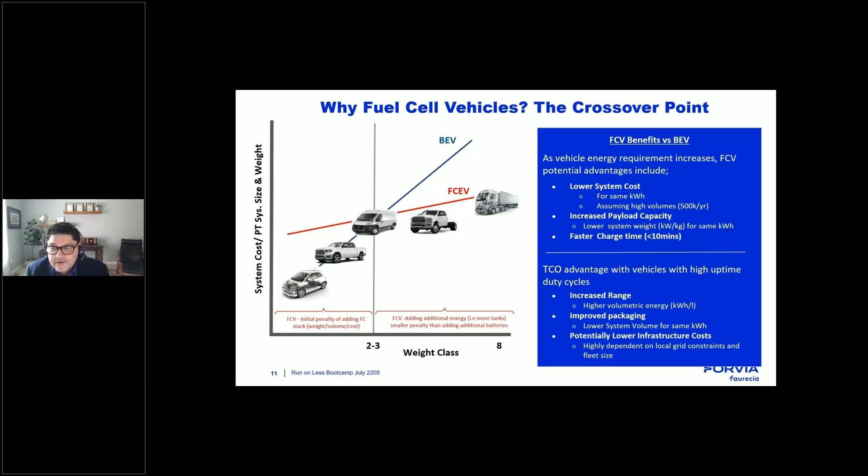Okay, so overall, why hydrogen? Hydrogen is what we call an excellent energy buffer. It's really good for applications where there's intermittent high power type needs, so vehicle filling is kind of one of those examples. The more renewables we see on our grids, where we see wind and solar happening intermittently, hydrogen becomes a really good way to store that.

So in the overall energy grid, and on larger vehicles, we see a picture where hydrogen can account for about 20% of the total energy grid, which includes transportation but also other industries like steel, fertilizer, etc. The other thing that works regionally well too is there's a pathway—multiple ways to make hydrogen and multiple ways to move hydrogen. So there can potentially be a solution for anybody wherever you are in the world, in terms of what feedstocks you have available to you.

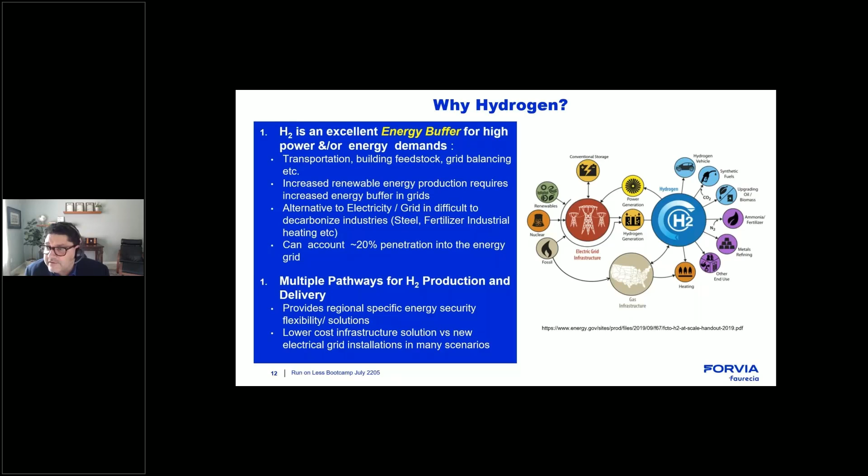The next slide describes all the different ways of storing hydrogen, from the more traditional to some more exotic versions. You'll see four main categories here: physical type storage, which you'll see on most vehicle offerings today—compressed gas, cryocompressed, and liquid. Cryocompressed is really the middle point between a pressurized and a liquid cold cryogenic type system.

Then there's a whole class of materials-based solutions where you store hydrogen like a sponge in different materials, and there's literally hundreds of different materials under study out there. The ones shown below are just some of the top hitters in different classes. We won't go into that today. Today we're going to focus for the most part on compressed and liquid, which are probably the two most near-term solutions, and which you'll probably be hearing from other panelists today too in terms of their offerings. Okay, next slide.

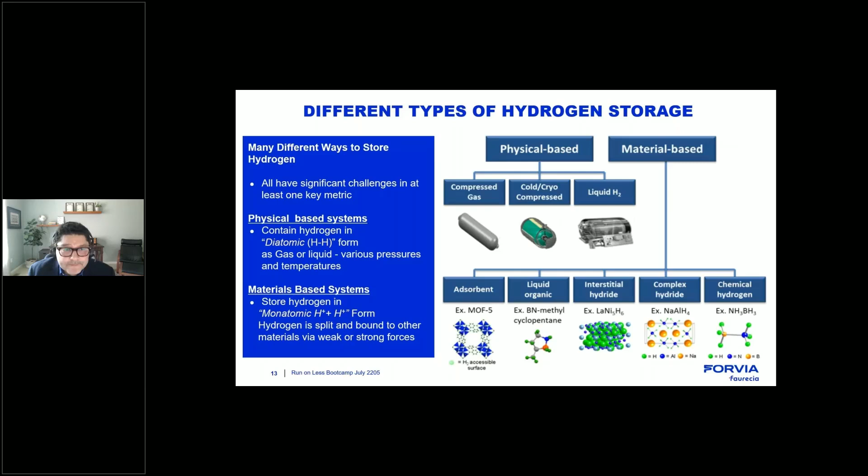So the first one, which will probably be the most common in the near term, is compressed hydrogen. Today, to get enough density for a usable range on the vehicle, we store anywhere between typically 350 bar, but more commonly now we're going all the way up to 700 bar, which is basically a 10,000 psi system—incredibly high pressures. To get a tank that's not insanely heavy, we're using a lot of carbon fiber, so these are all composite wound tanks.

Some of the advantages of this is it's a relatively simple system, behaves for the most part just like a propane or CNG type vehicle, which we have a lot of experience with in the market today. It fills quickly for the most part.

Feels almost on average, in terms of fill time, like a diesel experience. And it is very safe actually. There's many videos you can watch online where you see the crash tests being done with the tanks. The tanks themselves are usually a lot stronger than all the metal in the vehicle around them, which tend to crush around them. The drawbacks, however, is carbon fiber is expensive.

The overall storage density is going to be the lowest of the three options you're going to see on this page. So the ranges you're going to get in the vehicles are not quite yet comparable to a diesel type range. The systems will be bigger with less range than a diesel current equivalent today. And compressing to 10,000 psi does use up about 20% of the actual energy value of the hydrogen itself, so it's a non-negligible amount of energy when it comes to the full energy pathway.

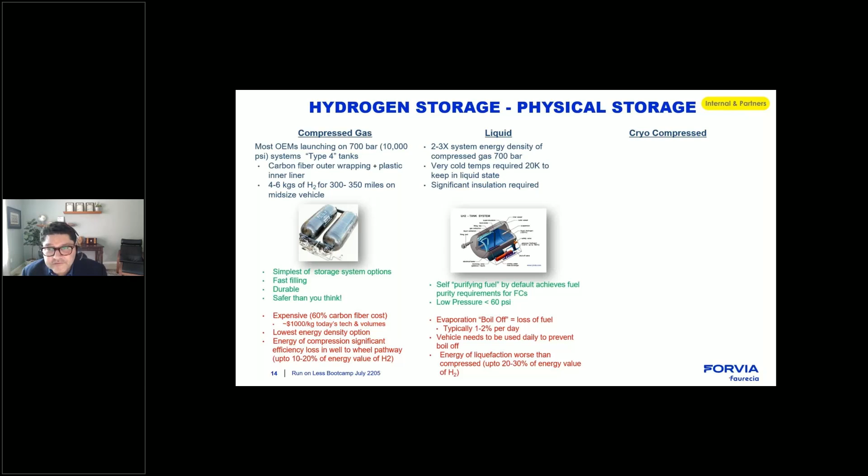Moving on next to cryocompressed. Cryocompressed is kind of an in-between of both worlds. It's compressed and it's also cold at the same time. You get even better densities of hydrogen storage. But as you can imagine, making something cold and pressurized is a very complex system.

Reliability can be a very difficult thing, and there's inconsistency in the fills. You may not get 100% fill every time, depending on how hot the system was coming in and how empty it was, which is usually not desirable to a customer. Usually you want to fill up, you want to know that your tanks are 100% and you're going to get X range. So that's one of the complexities of dealing with something that's a two-in-one shampoo - a shampoo conditioner. You never really get the best of both worlds.

Moving on next. Tark, we've got about 30 seconds left for final points.

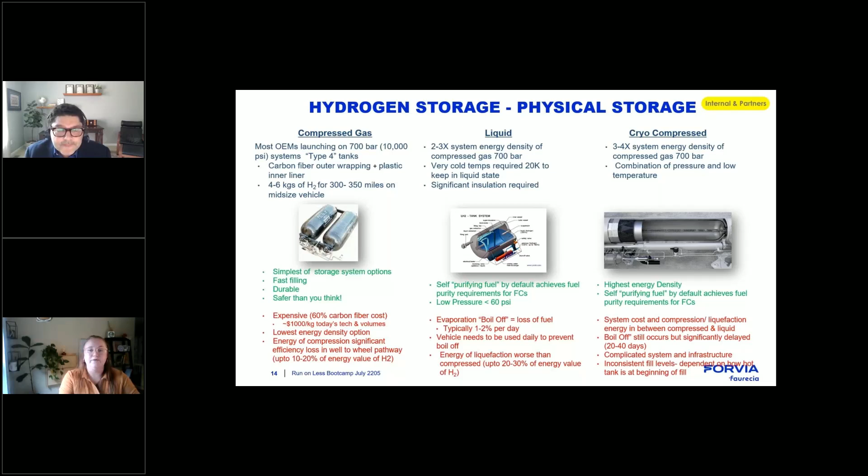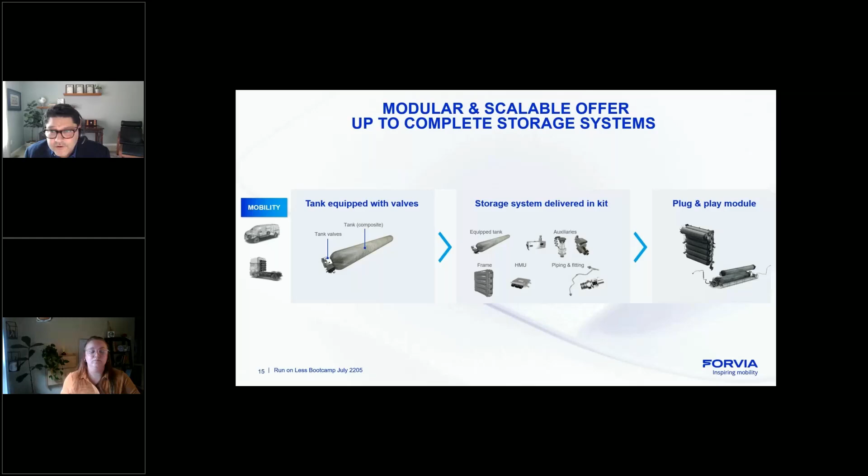Okay, all right. So just quick offering in terms of what we do is full tanks all the way to full systems. Maybe we'll move on to the next one in terms of offerings.

Just a little background: Cummins is the world's largest independent engine manufacturer. We recognize the need for greenhouse gas reduction as well as the world needing power. So Destination Zero is our initiative to lead to a zero emissions future, where we can also continue providing the power that the world would need. Hydrogen internal combustion engine is one of the technologies we have been working on.

Cummins actually operates in a pretty wide range of applications, at least a few at the bottom. We work on both on-highway and off-highway applications. We see interest from both, just to list a few: regional haul, line haul, vocational construction. If you look at those applications and see which fuel gets the work done today, diesel is versatile, reliable, low cost, and widely available, so it's a pretty good fuel to use. But with the motivation of reduced greenhouse gas, we're getting into this messy middle.

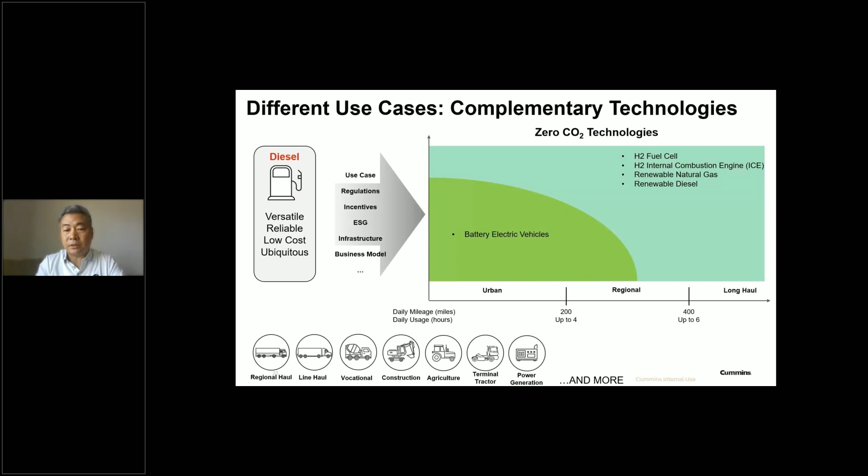For low load and low operating hours, BEV definitely is the way to go, just like Tarek mentioned. But when we get into the hard to abate sectors, hydrogen technologies do play a significant role. I want to mention both hydrogen fuel cells and hydrogen internal combustion engines, among other fuels like renewable natural gas and diesel. If you go to the next slide, we'll talk a bit about hydrogen ICE.

So hydrogen ICE, by definition, is basically an internal combustion engine fueled with hydrogen. For Cummins, this is our spark ignited engine variant. It would be similar to the natural gas and gasoline products we have on the market. It utilizes existing installed capacity in engine and component manufacturing, and it will extend the internal combustion engine's life, and it is complementary with the fuel cell, like the other panelists mentioned earlier.

I have two tables at the bottom to address this in a bit more detail. On the first table on the left-hand side, we're showing diesel, hydrogen, natural gas, and gasoline. They all share a lot of base engine and installation parts. Between hydrogen, natural gas, and gasoline engines, they share a lot of commonality in their cylinder head, ignition system, engine control modules, and software. Hydrogen does have a unique fuel system and air handling system, which I will introduce in the next slides, and its after-treatment system actually shares a lot of commonality with our existing diesel product. So it provides a really complementary path to develop hydrogen when we already have diesel and natural gas products.

The second table on the right-hand side is comparing the hydrogen fuel cell and the hydrogen engine. They share a lot of commonality in terms of hydrogen production, distribution, fueling stations, and onboard storage. Hydrogen ICE is believed to have a faster path to market. I think working on the hydrogen engine can potentially improve that infrastructure for the fuel cell as well.

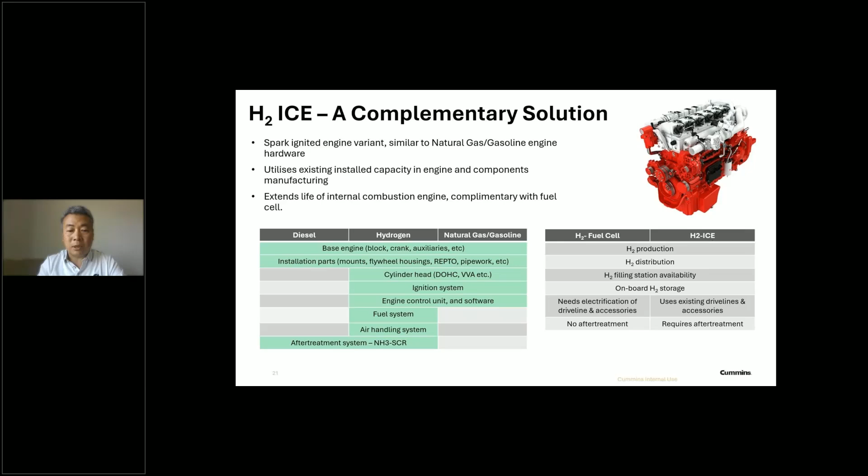If you go to the next slide, I have more information about how Cummins looks at the hydrogen engine architecture. We are working on the medium duty and heavy duty hydrogen engine as we speak, with similar architecture considerations to commonize their architecture. I want to point out our base engine is part of the HELM platform - high efficiency, low emission, and multiple fuels engine platform for spark ignited engines.

We do have the advantage of having a pent roof tumble system. This offers a unique opportunity for us to use direct injection hydrogen, which brings the benefit of safety as well as power density advantage. We also chose the lean burn air fuel ratio compared to the stoic, bringing much better efficiency.

But when we go into the lean burn, we do need a lot of air. So this is the partnership with our internal Cummins turbo technology to identify the turbo options to deliver the air we need from steady state and transient as well. We also partner with our internal valvetrain partners to optimize the valve profile to balance between airflow and abnormal combustion.

On the ignition system, we do not need a unique ignition system, but considerations need to be given - we do need the cold spark plug to reduce abnormal combustion from the ignition system, as well as meet spark plug life expectations since this is lean burn.

And since this is lean burn, we also need diesel-like aftertreatment, like a urea SCR, to control the criteria emissions. In the lab, we are able to meet the global emissions using the SCR system.

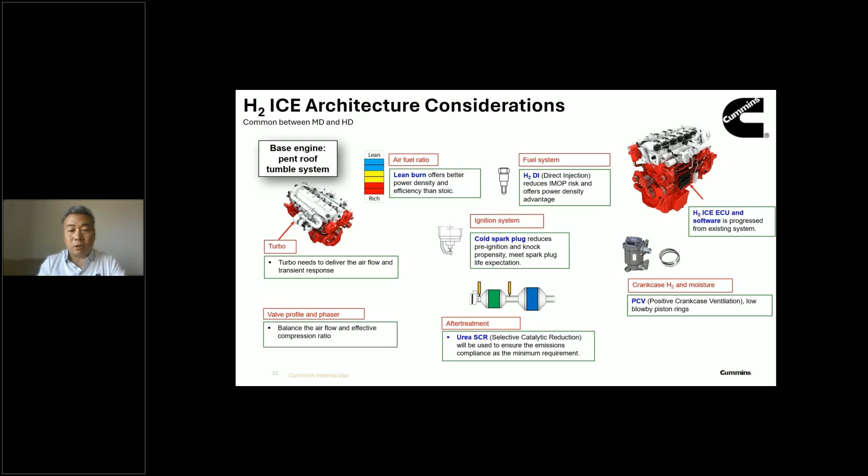Like I mentioned earlier, we are also working on the medium duty and heavy duty engines. The medium duty is 6.7 liter, the heavy duty is a 16 liter. I won't report the power and torque range, but they are comparable with our current diesel product. We do target to meet the global emissions level.

I won't repeat the architecture, but I do want to point out the unique Helm platform offers the tumble system, enabling us to run direct injection and lean burn to achieve the power density and efficiency we need for our customers.

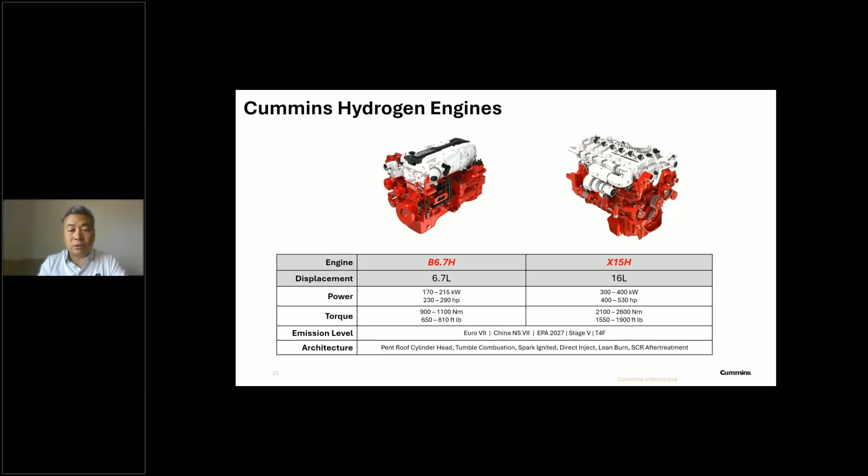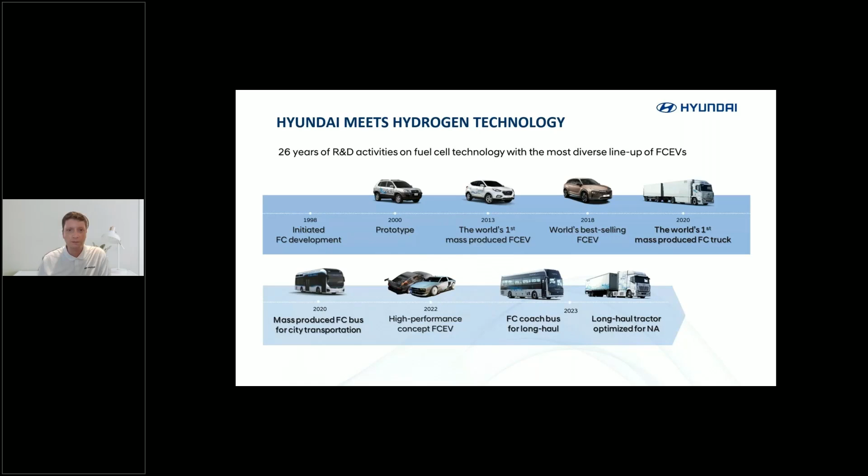When it comes to the European deployment, which I was working on back in 2018 - so that's now a good solid 7 years of development on this truck - we have accumulated about 8.3 million miles in customer operation. We have 49 trucks on the road, and we have been proving that this technology is highly reliable and works really well, with the fuel cell system actually lasting longer than we initially expected.

The fuel cell itself comes from our Nexo light-duty product, but has been upgraded with regards to durability to meet the heavy-duty trucking demands. And we got fantastic customer feedback, quoting low noise and vibration, obviously similar to a battery electric truck. This is a very silent vehicle to drive, very comfortable to drive. We had no major breakdowns or quality issues.

And what people often overlook is the cold weather performance. Switzerland gets quite cold, and it has been excellent - we lose maybe a couple percent of range during winter months, which cannot be said about battery electric trucks where you need a lot of power to heat the cabin. This can all be done here with a fuel cell truck using waste heat that we capture from the fuel cell systems, which operate at about 60% efficiency.

Next slide, please. So this is an overview of our heavy-duty truck, the Xcient Fuel Cell. You can see that it's a cab-over engine European-style truck that we quickly adapted to be quick to market here in the United States.

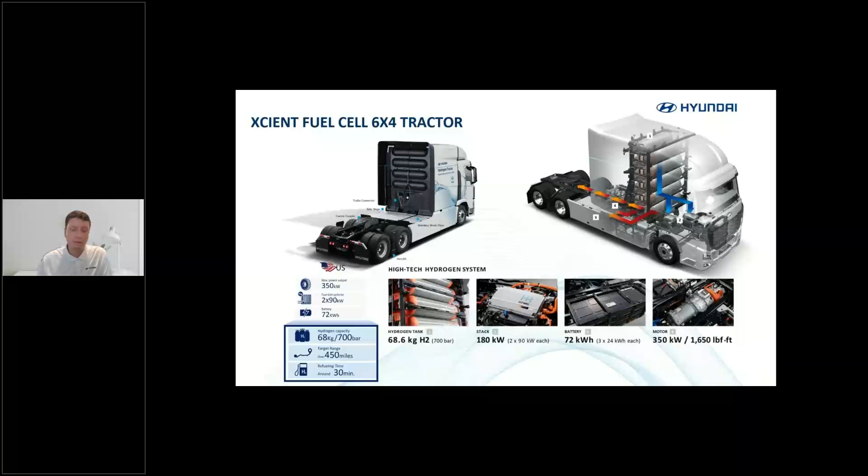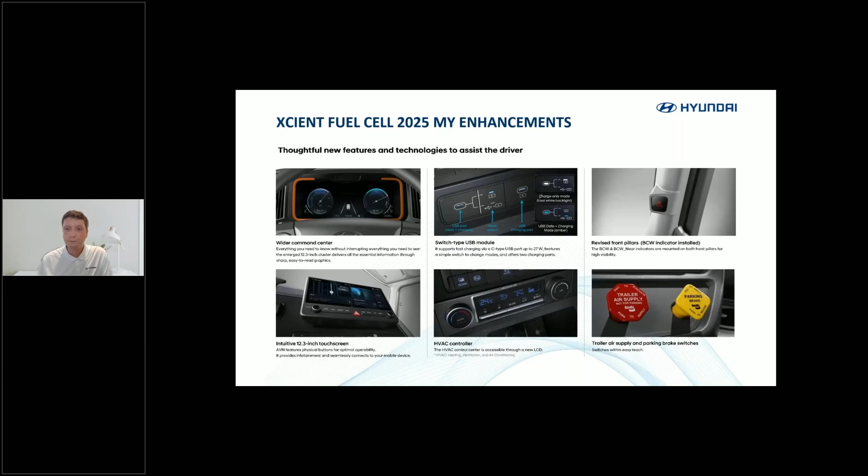Often overlooked are all the community benefits that come with these deployments. So we abated a lot of CO2 and criteria pollutants, which is always important to mention in front of our sponsors, of course, and also the politicians that have been so supportive of this project. Next slide, please.

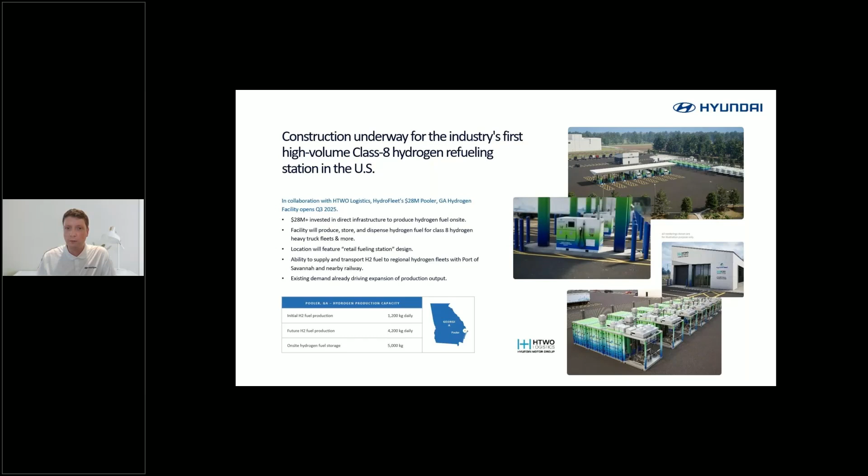In our first initial step, which will go online later this year, we have about 1.2 tons of gaseous hydrogen available. This hydrogen, and this is very special about this site, will be produced locally with an ATR system, taking in natural gas and basically producing the molecules right where we consume them in a modular way. So we are able to add more units and more systems according to our truck deployments, and we'll have a final build out of 4.2 tons of daily hydrogen fuel available with 5 tons of hydrogen storage.

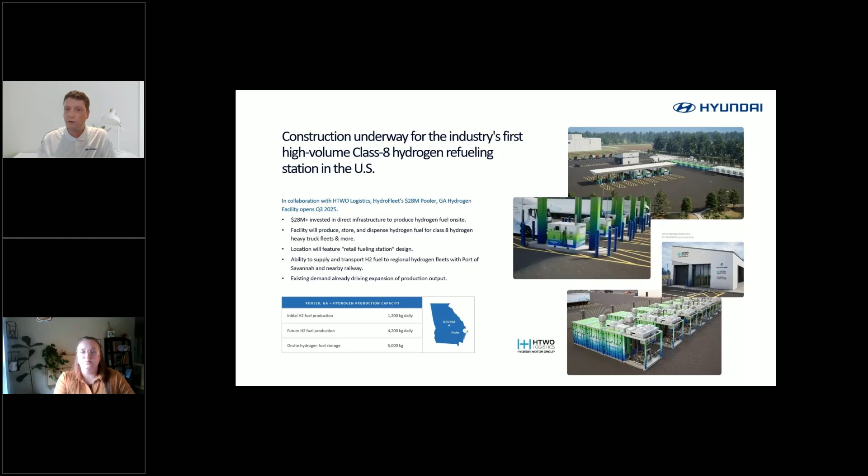I just lost my screen for whatever reason. Sorry. So I think that, in the interest of time, concludes my talk for today. Thank you very much for your interest.

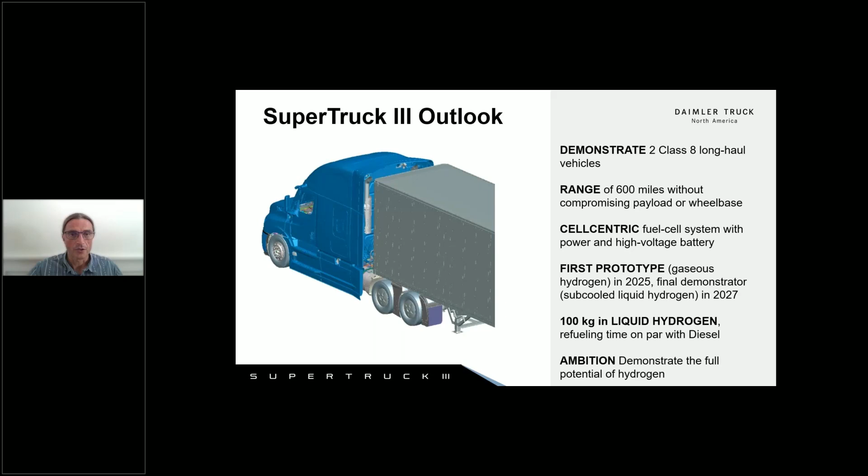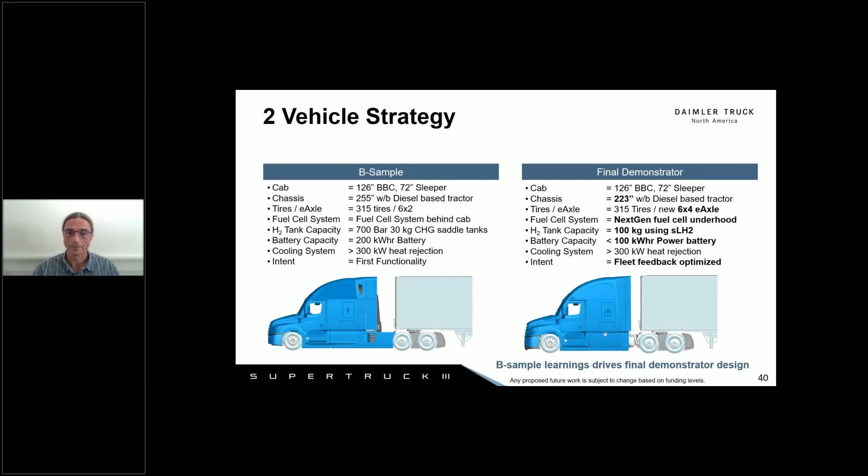Yeah, that pretty much concludes our section there. Stay tuned as we continue to build these things out and as we report on progress towards our super truck. Thank you. Fantastic. Thanks so much, Derek.